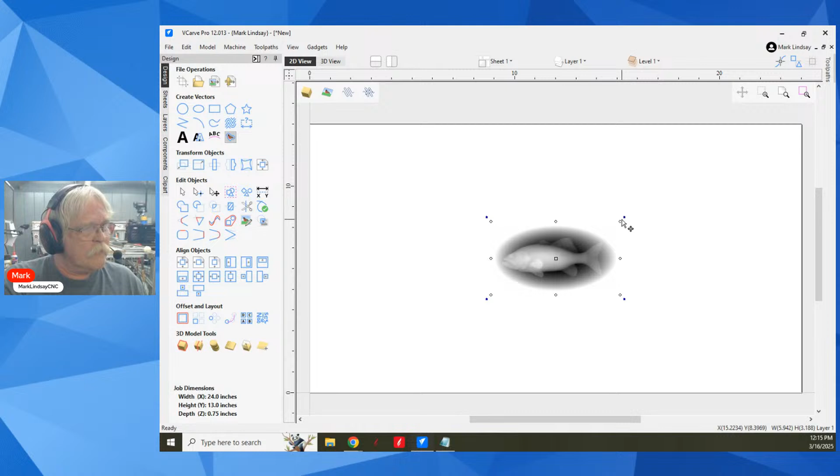And so to do that, let's get over here into VCarve. I'm using VCarve Pro for this, but I will need to get something 3D. So my 3D, let's look at here. What do we got here? We'll go for a fish in a dish. Why not? Hey, I'm a poet and I know it. All right. And I'll go ahead and enlarge this so we can all see it. There we go. We got Billy Bass.

All right. Let me go into my components here because I see another question out here. Rich asking, what's the difference between the U and the upside down U in the modeling component properties, i.e. brown interior versus non-colored interior? This is the combine mode, okay? The combine mode is how this model is going to interact with other models. Now we can right click here and go into the properties and we can see all of them illustrated right here.

The brown U's and O in this case are, this one here is merge. You're going to merge the highest points with other components. So in other words, this fish is going to merge with any other component I put on top of it or any other component underneath it. Okay. This one here is merge the lowest points. That's something we can get into another time because merge low and multiply are topics of their own that can take an entire live stream. So we'll get into those on later dates.

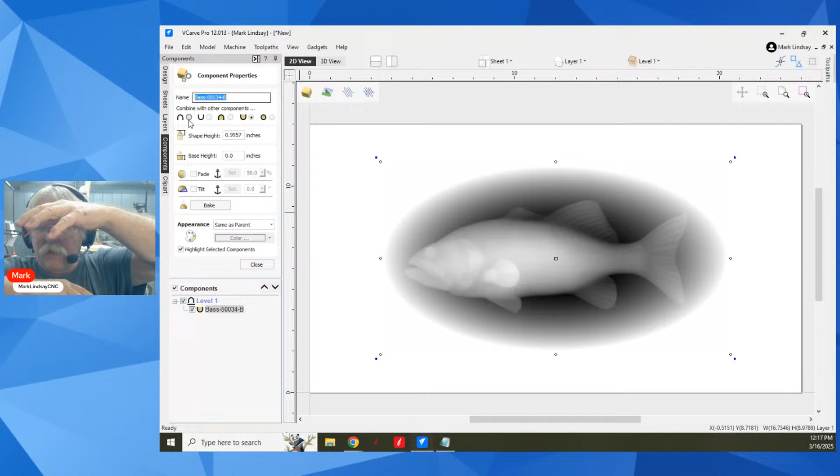These over here without the brown, this is add to the previous component. This is subtract from the previous component. What this means is if I put something else on top of this model, if I have it in add, it's going to stack that second component on top of this fish. So I'll have the fish, then I'll have whatever I put on top of the fish. If I set it to subtract, whatever I put in here is going to be subtracted from the fish.

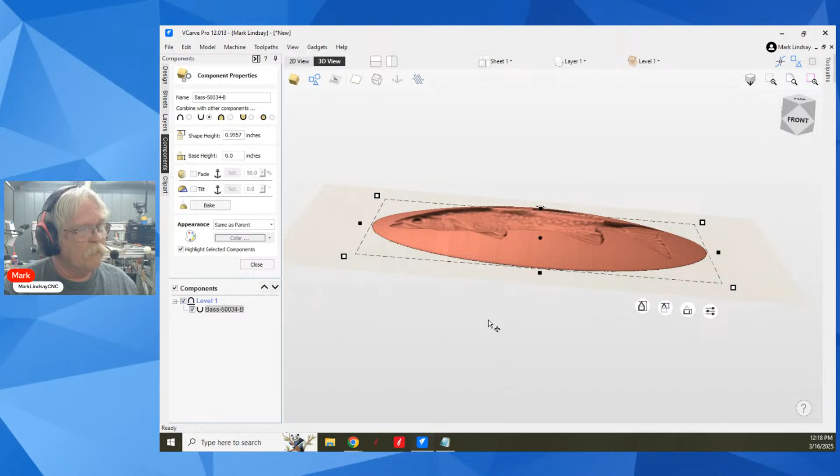If I set this model to subtract, let's take a look at it in the 3D view. We're looking at it in the 3D view right here, and we see what this looks like. If I set this to subtract, now all of a sudden, that dish has turned into a dome, and that fish is scooped out, almost like I was making a mold. And in fact, you could use this to make a mold if you really wanted to. I wouldn't do it with the dome. I would go for the flat fish, but, what can you say?

So this is showing you how it's added on top of any component below it. This is subtracting it, and this is merging the highest points. So if you look at this model, the highest points are the edges of the dish. Okay?

This becomes important here because now I'm going to add a zero plane on top of this. And this is something that bears repeating. I've said it before, I'll keep saying it. Once a zero plane is added, it becomes part of the model. Okay? It is a component.

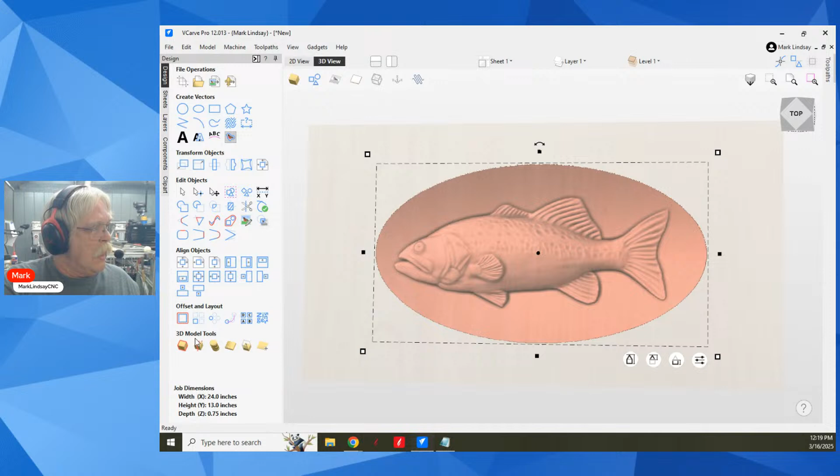So if I come out here to the design tab and I come down here to add a plane or component with zero height covering the model, and I click on that, now you see how my material lighted up. There is a flat plane with no thickness covering the entire piece of material, but it's merging with this model. And you can see that merge happen right here. It's merging with this dish. You can see that merge occurring right there.

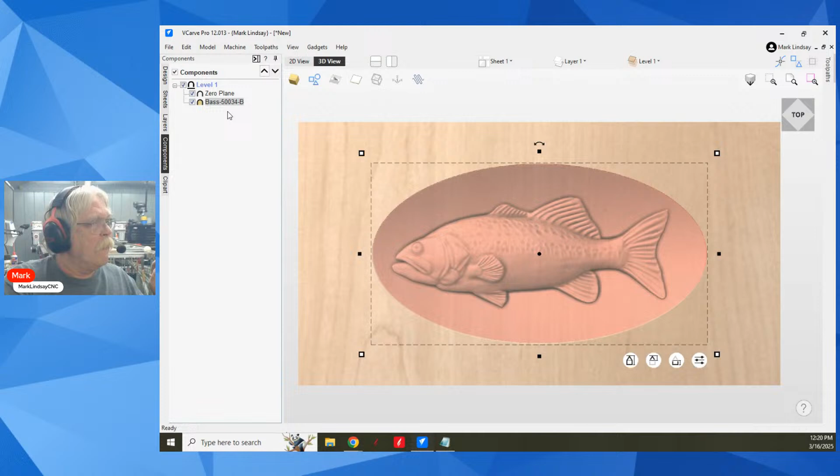Now, if I get into the component tree, we can see that that zero plane has been added. So that's what these do. These are your combine modes. It's how this component is going to interact with this component. And they are separate components that you can select or deselect. Okay? So let's go back over here to the design tab, and then we'll get into Brooke's question over here.

Talking about 3D roughing. Now, there are occasions where 3D roughing is important, and there are occasions where it's not important. I tend to say that it depends upon the project. Mainly because, well, let's talk about the purpose of a 3D roughing toolpath. The purpose is to hog out as much of this material as it can, a lot faster than a 3D finishing toolpath will run. And when I say that, it's dependent on the project.

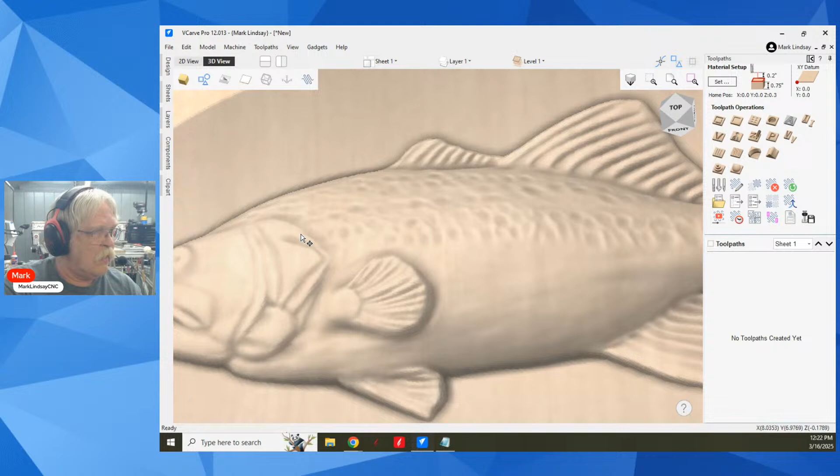If we're looking at a real shallow carve, there may not be a lot of material to remove with a roughing toolpath. If we're looking at something real deep, and in the case of this fish, we have some detail in here, we're going to need to use some fairly small bits. We want to make things as easy on that small bit as we can. Because if I'm going to use a 1/16 inch ball nose to get in here and get some of these details, it may be a 1/16 inch tapered ball nose bit, which is a bit more robust than a standard 1/16 inch ball nose. But at the end of the day, the tip of that bit is still 1/16 of an inch in diameter. So you'll want to remove as much of this as you can to make it as easy on the bit as possible.

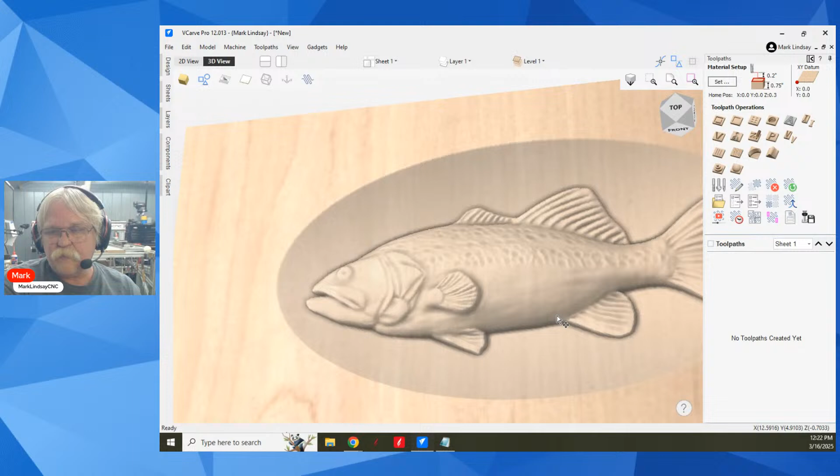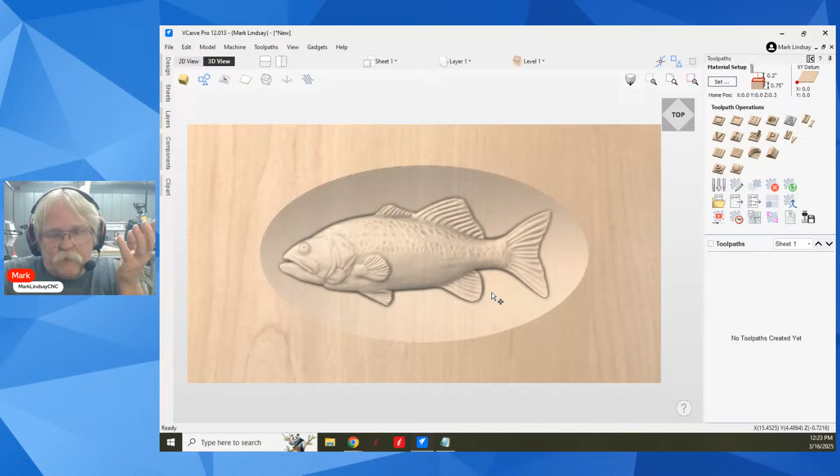So it is very dependent. If you're doing something like a 2-foot diameter 3D barn star, and you're cutting it out of a foam material that you've stacked 2.5 inches deep, you might want to do a roughing pass just to make things easier on the bit that's going to be carving that star. If you're going to do something small that's going to be held in the hand, say the top of a small jewelry box or the back of a hand mirror, you may not be carving something that deep, so you may not need a roughing pass. So it's kind of dependent on the project, as I said.

Now, let's get into the roughing toolpath, and we'll check on a couple of things here. First things first, it's going to send me into material setup. So I'm going to double check the thickness of my material. Yes. Show a detailed summary. Yes. My XY datum is correct. I'm setting my Z0 to the material surface, and we have an issue. The total model thickness is deeper than my material thickness. So I can go about this two ways.

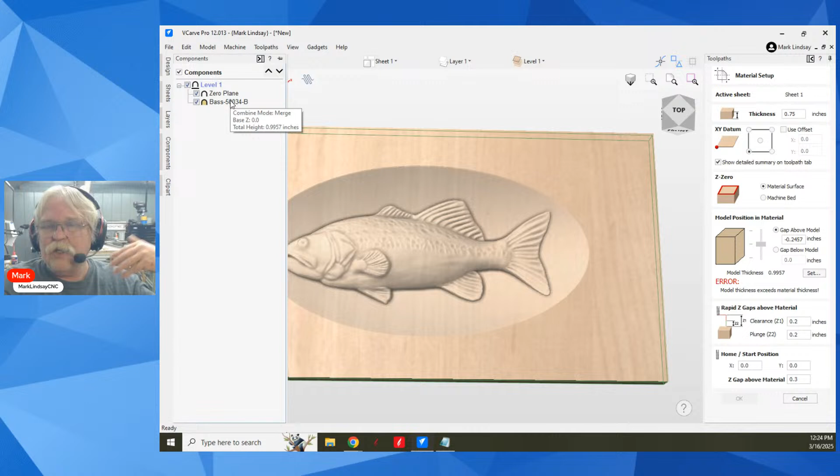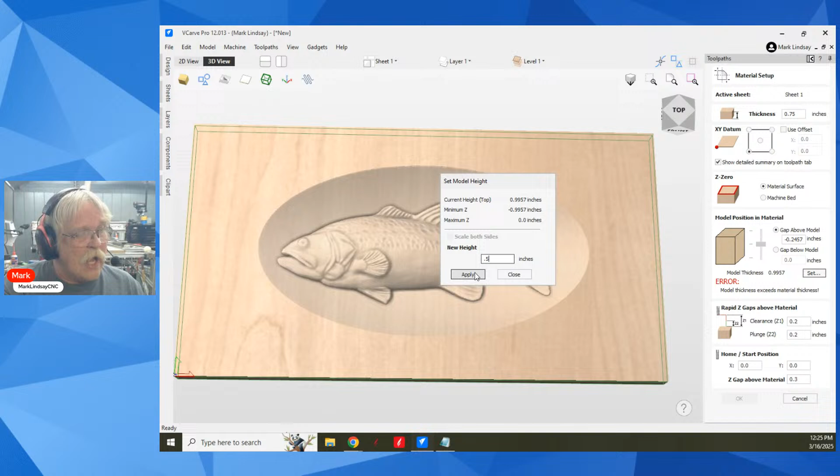I can go back over into the component tree, get into the properties, and change the shape height of my fish there. Or I can come over here and click the set button and enter a new height here. I don't want it to be 0.995. That's almost an inch tall, you might as well say. Let's go for a ½ inch. So we'll go 0.5. Now, when I click apply, let's take a look and see what this looks like. It's just changed my shape height to a ½ inch tall.

Now I need to get in here and look and see, did I lose a bunch of detail? It has flattened it. I might lose some detail, but I'm not going to carve all the way through my material. So I think I can go ahead and accept that.

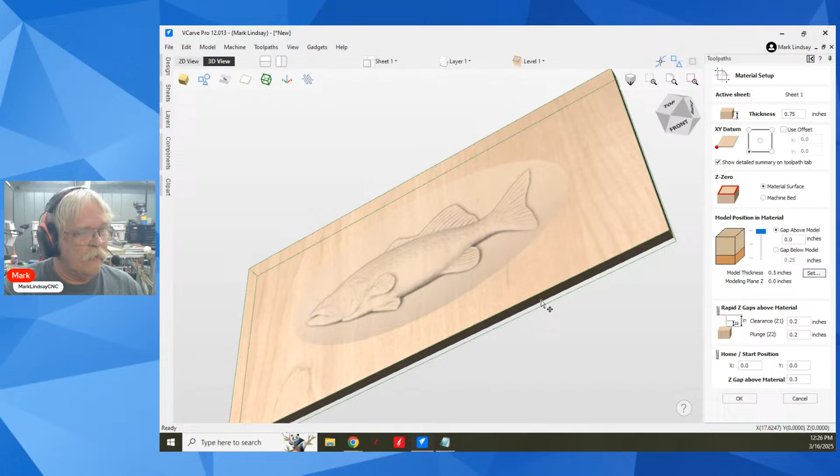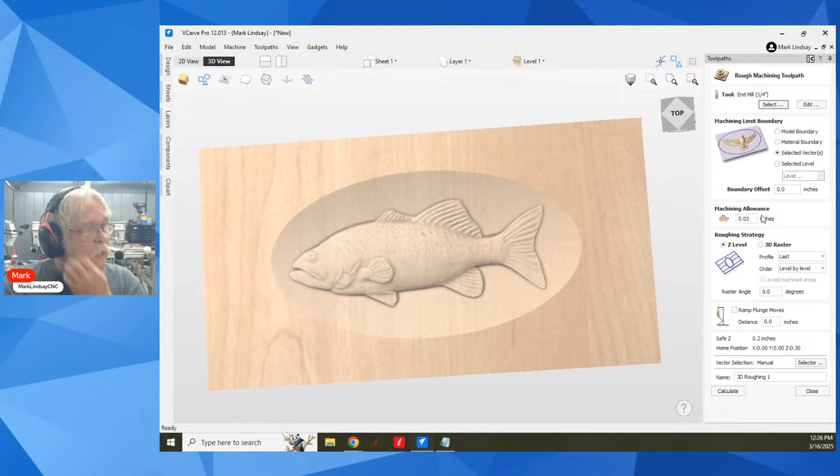Next thing I want to look at is my model position. The model is sitting up here where this light brown is. This is uncarved material. That's what's going to be left behind down here. So I prefer to put a little bit of a gap, 10 thousandths of an inch, 0.01. That would eliminate any flat spots on anything that's close to the top up here. And we'll click OK. There we go. Now, I'm going to show you something here.

I've got machining limit boundaries here. I can go to the model boundary. I can go to the material boundary. I can go to the selected vector. I don't have a vector out here to carve to. Or I could go to the selected level. I only have one level over here in my component tree. So basically, I'm down to either the material boundary or the model boundary.

I'm showing you this because it does matter. Once I added this 0 plane, that's part of the model. So the material boundary and the model boundary are going to be the same because I don't have a vector out here. So let's fix that.

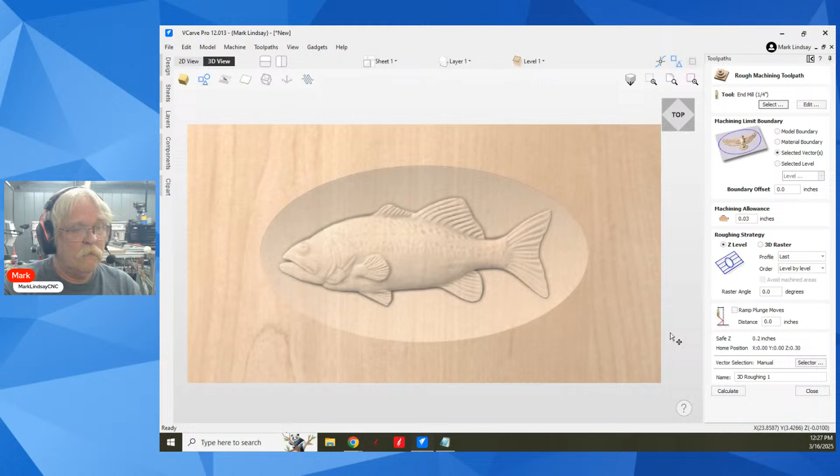Close, go back over, and I'm going to go select my fish. And where is it? It's down here, I believe. Yeah, there it is. I'm going to create a vector boundary around this component. Click, and now I have a vector. Now I'll go back over here. I'm going to select that vector, go into my roughing toolpath, and now it's only going to machine to this vector.

It's not going to try to machine the whole piece. This is important because if I have clamps out here, I'm going to run into them. It's the same as doing the entire material boundary. Okay.

Now we'll get down here into the 3D roughing strategy. We have a couple. We have Z level and 3D raster. I think this is more what you were talking about, Brooks, but I don't know that 100%. Here's where you have to be careful, and you'll have to look at your model. Okay.

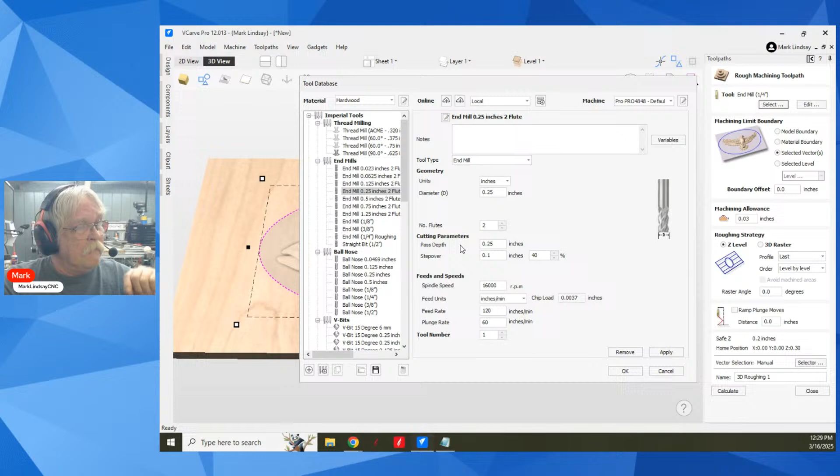Z level, what you're going to be doing is you're going to be carving this entire area out level by level as determined by the, see, what have I got here? I got 1/4 inch end mill, as determined by the pass depth of this bit. So now this is going to come down and it's going to cut down level by level 1/4 inch and machine this out. Okay, I can cancel that.

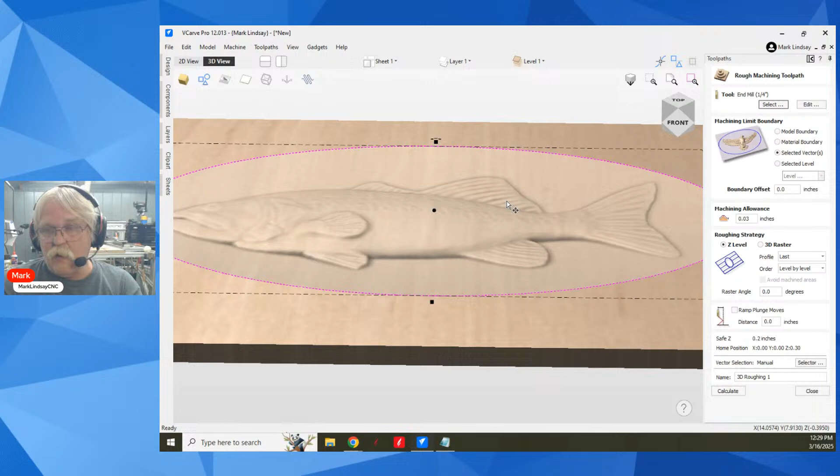It may never get all the way down into here, but it's going to start missing. It's not going to carve the model. It's going to carve away all of the waste out here, most of the waste down here. You can also do 3D raster.

Oh, and I should say with Z level, you can have it do a profile last, first, or not do a profile. And what I mean when we say profile, we mean carving around this vector right here. That may not be important, okay? It may not be important to do on a roughing. I tend to leave it at last.

What order are we going to do it in? I go level by level. Just go level by level. Okay? I've never used depth first, so I don't know that I could give you a definitive answer as to what that is. Maybe Michael Mezalick can help me out. But I've always gone level by level.

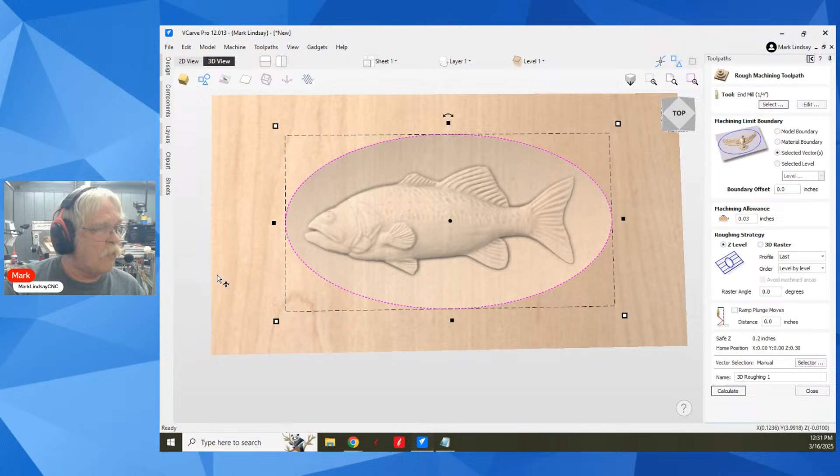The raster angle is, we're not using a raster toolpath. We're using a Z-level toolpath. It is going to raster back and forth to remove this material. I set the angle to match the grain. With this board being vertical grain, I would set an angle of 90 degrees. Basically, that's just to kind of help avoid doing any chip out around on the outside. Because again, all of this is going to be carved away.

Okay. I haven't talked about boundary offset and I haven't talked about machining allowance. I will talk about machining allowance. This allowance, in this case, 30 thousandths, that's as close as this roughing toolpath is going to get to this actual model. It's going to force the tool to leave a 30 thousandths of an inch skin here. What it does is it keeps that bit from carving down into this model. Okay.

Maurice over at Ericsson Design says, my roughing passes come down to the limits of my belt-driven CNC. Clearing enables me to run a tapered ball nose faster if I'm only removing under a 1/4 inch of material above my model, decreasing my overall machine time. Yes. Again, yes. You can run that bit a little faster. You can plunge a little bit faster. And you're making life easier for that bit. That's the whole purpose of a roughing toolpath.

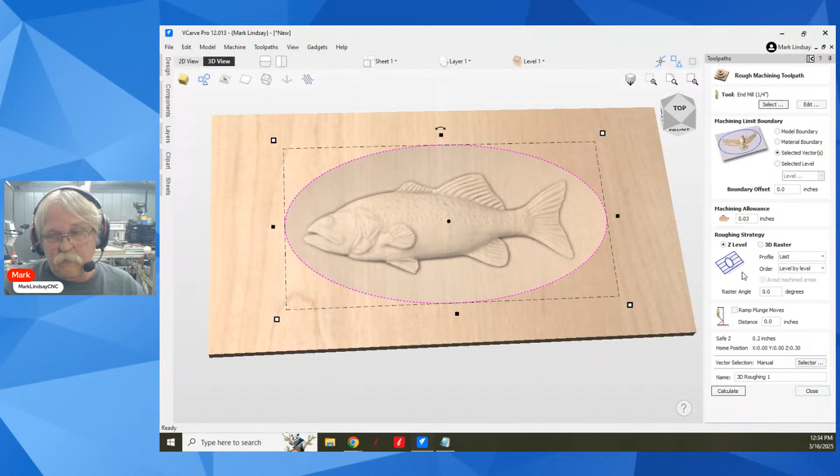And you can avoid machined areas. You can set a raster angle here as well. But again, this is dependent upon the project, dependent upon the model. Okay. I tend to run Z level. And that is mainly going to be carving this area out here. It'll get close to the fish, but it's basically going to remove the skin above the top of it and then not get any closer to this model. It'll let that finishing bit do all of the work there.

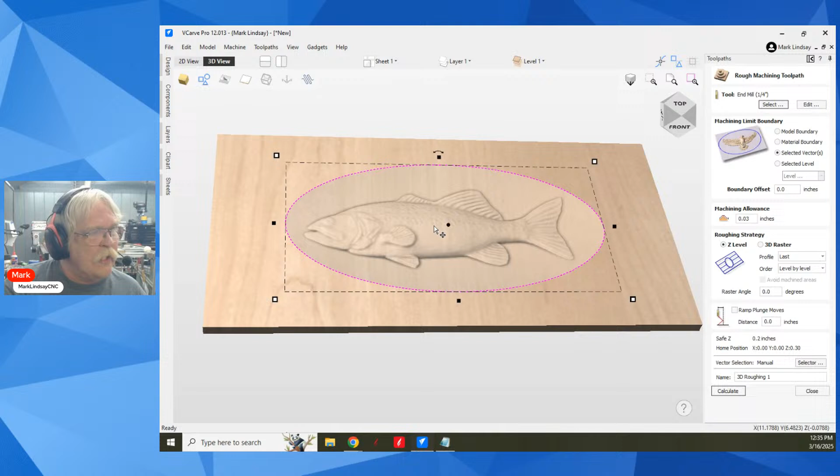So that's how I work with roughing toolpaths. Generally speaking, I go with Z level. 3D raster adds a lot of machine time, but it can be the better way to go. Again, if you're going with something small that's going to be held in your hand and you're going to be using a very tiny bit with a delicate tip on it, it may benefit you to use 3D raster. In that case, I would probably go with, say, a 1/4 inch ball nose and not a standard end mill. And that will be able to get in here and get a few more of these details roughed out.

But again, it comes down to the project. If this is something that's going to be on a wall 8 feet up and seen from the ground, you're probably not going to use tiny bits to do that. Probably not.

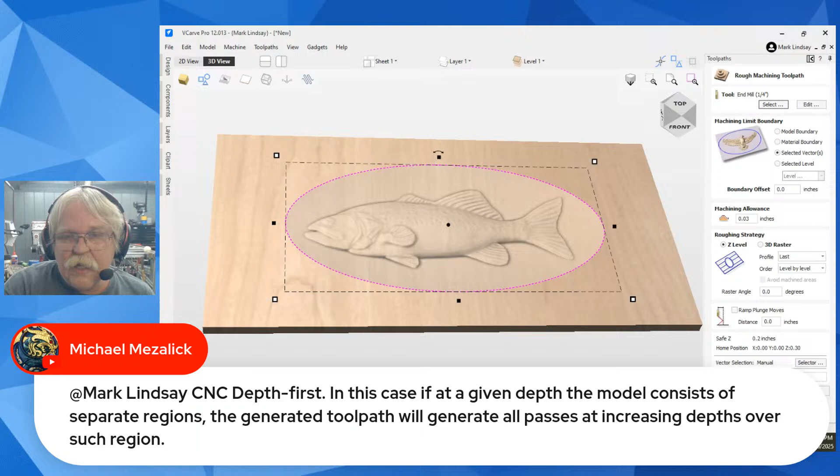So, okay, Michael has an answer for me on depth first. In this case, if at a given depth the model consists of separate regions, the generated toolpath will generate all the passes at increasing depths over such region. Then it will advance to other such regions. Okay, so in this situation then, Michael, since it's basically one region, and I don't have a fish over here and a fisherman over here and then an eagle over here, it's going to do each region first, and then move on to the next, rather than attempting to cut them all. Okay, got it. Thank you for that. I appreciate that. I've not used it, but I can see how it would come in handy.

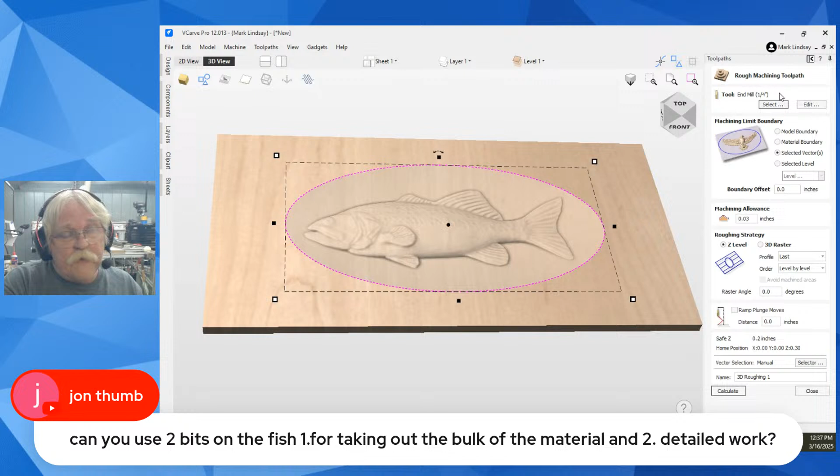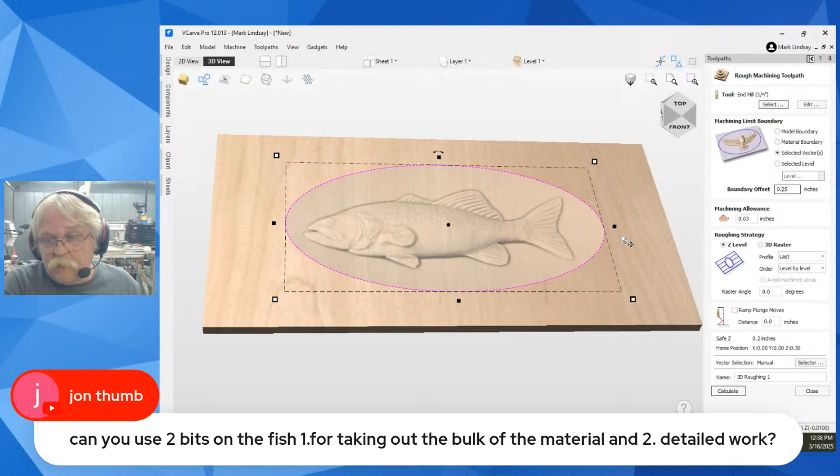So, John Thumb is asking, can you use 2 bits on the fish, one for taking out the bulk of the material and one for detailed work? On a roughing toolpath, you can only use 1 bit per toolpath. I'll go ahead and calculate this. I'm going to use a boundary offset that's equal to my end mill's diameter, so 0.25. One decimal mark, not 2. All that means is the bit is going to go beyond the edge, beyond this vector, by 1/4 of an inch. Okay. And we'll calculate it.

All right. Now you see what it's going to do at each level. We'll go ahead and preview that roughing toolpath, and that's what it's going to leave behind with those settings that we used. It's not carving the fish. It's removing a bulk of the material around the fish.

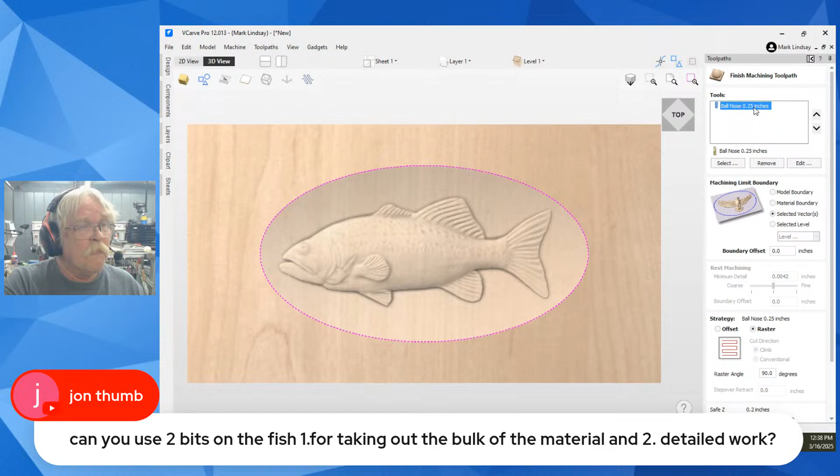And I know, Brooks, that you asked about roughing, but I'm going to get into finishing as well because it is pertinent here. When we get into the finishing toolpath, we also have 2 other strategies, offset and raster. I'm going to go with the selected vector. To answer Jon's question, this is where you can use more than 1 bit on your finishing toolpath. Now, there's nothing saying you can't make more than 1 roughing toolpath, but generally by the time you start getting into that, you're adding quite a bit of machine time, and there's not really much benefit.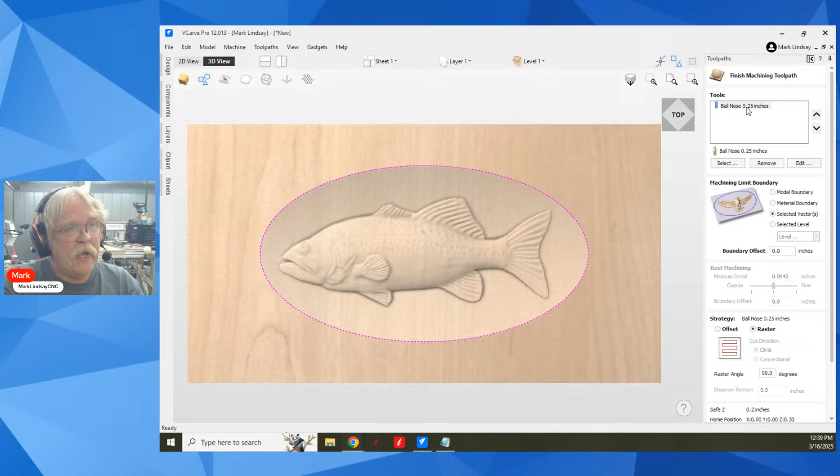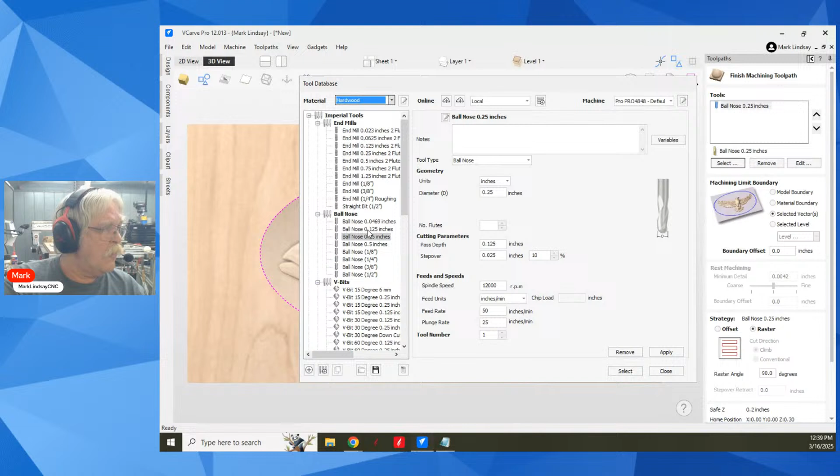So for my finishing toolpath, what I have here is a 1/4 inch bit. These parts of the dish out here and a lot of the fish itself don't really require a lot of detail, so they don't need a super tiny bit. But I can add another one. And let's go with an 1/8 inch ball nose. Well, let's see what I got available here for tapered ball nose bits.

We'll go with a 1/16 of an inch tapered ball nose here, and we'll select that. And now this has added both of those bits there, okay? What's going to happen now is that 1/4 inch ball nose is going to get everything it can get. And everything it can't reach, like if it can't reach down in here or into the mouth down here where the gills are, it's going to do its best it can, but then keep track of what that 1/4 inch bit can't reach. Then it's going to create another tool path just for that 1/16 of an inch bit. Okay? So it's going to get in here and get all this stuff that the 1/4 inch bit can't reach.

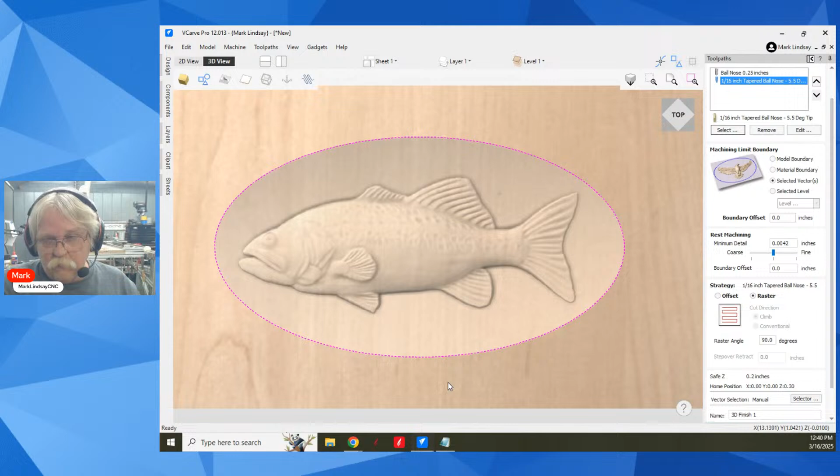Offset versus raster. This causes a lot of confusion as well. And here is where this becomes important. You have to look at your model. If your model is like this and you have a dish, even though we've got some height here, there's a little bit of material to carve through. On something like this, raster is the way to go. The reason for that is raster is going to start out here and it's going to move back and forth. With the raster angle of 90 degrees, it's going to start over here close to my start point and it's going to move up and down and it's going to cut progressively deeper. That's going to be a heck of a lot easier on the bit than if I use an offset strategy.

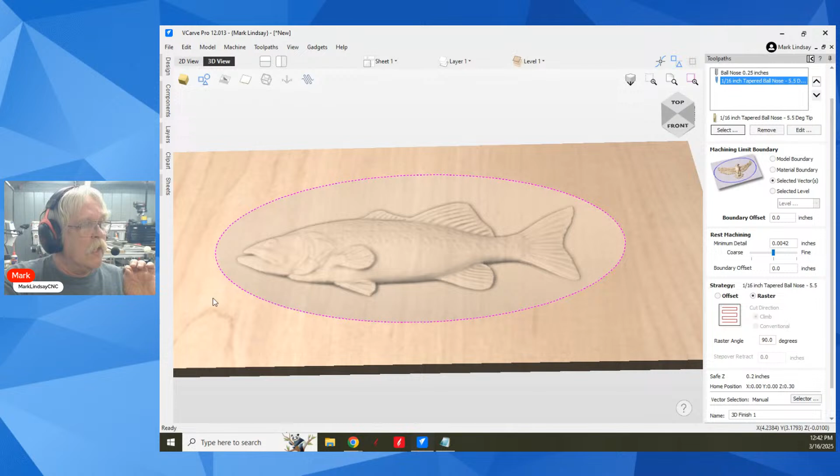An offset strategy, it's going to start in the middle. The bit's going to come over here and it's going to plunge down to the center and start carving in a spiral. Okay? It's going to carve down to the final depth. So, if you are cutting a 3D model that has some depth down in the middle, you'll want to use a raster strategy to ease that bit down on a dish. Having said that, let me go ahead and we'll calculate this with a raster of 90. Okay.

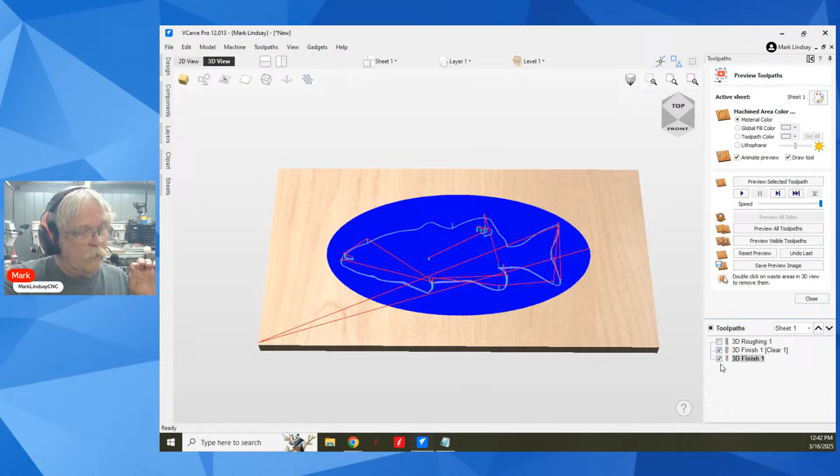And I will preview the first one. Oops. Undo last. I meant to preview that one. Preview that tool path. You can see how that went down in there and eased its way down into the depths of that model. The 3D finish, that's all it's going to do. The 1/4 inch bit was able to get everything else. But you can see here what that little 1/16 of an inch bit is going to carve. So let's carve that. And there's our final model. Okay. Now, going with a raster toolpath in this situation, where you have a gradual incline here down to the final cutting depth, it's best to use a raster toolpath. Okay. Let me close this and we'll do something else.

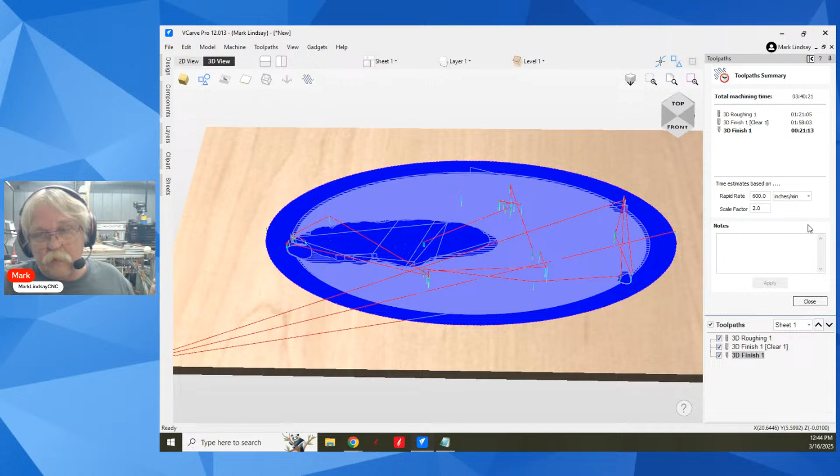John is asking, how long did that estimate to complete? It's pretty big, so let's find out. 3 hours, 40 minutes with my settings. That's for everything. So 3 hours, 40 minutes, but then again, I've got this behemoth behind me. It's a pretty robust machine, okay? So let me go back over here and we'll do something else real quick. Yes, having a big, robust machine works. It really helps out there, Rich.

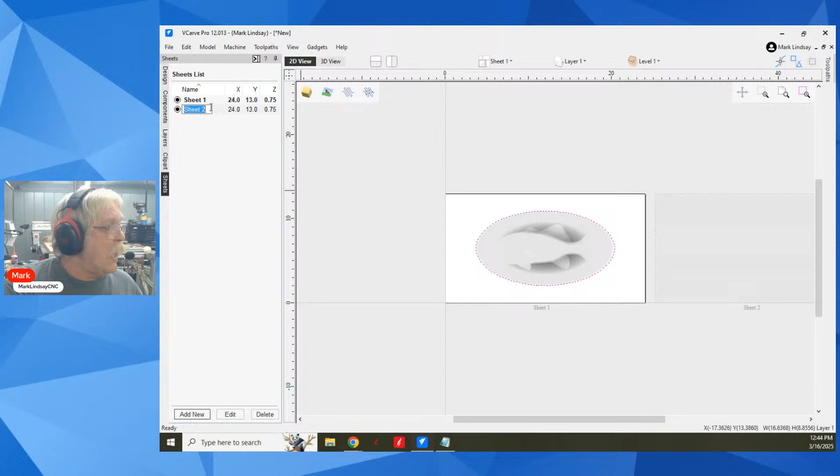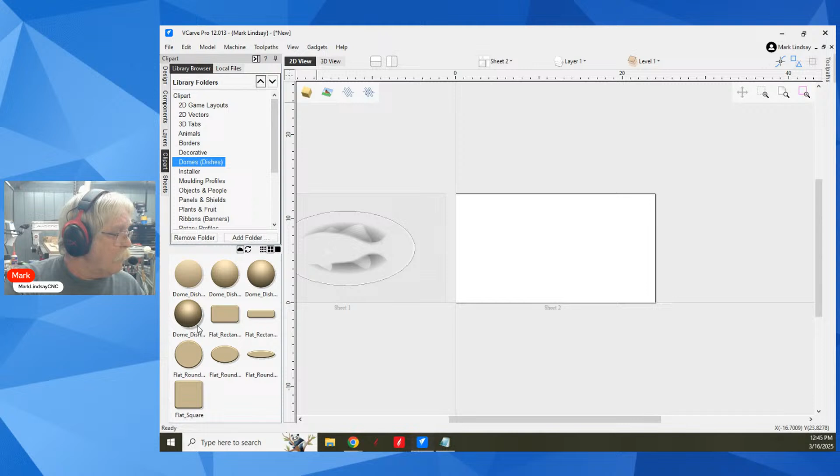I'm going to go in and I'm going to add another sheet. So let's go down to my sheets tab, add new, and I'll just call it sheet 2. Go back to the design tab and I'm going to go into sheet 2. That's going to be my active sheet that I'm going to work with. Okay. So we're going to go over here to clip art, and let's take a look at domes and dishes. We'll go for a flat rectangle here. And I'm going to make this larger. And I'm going to go back into my design tab. Let's take a look at the 3D view and see what we got.

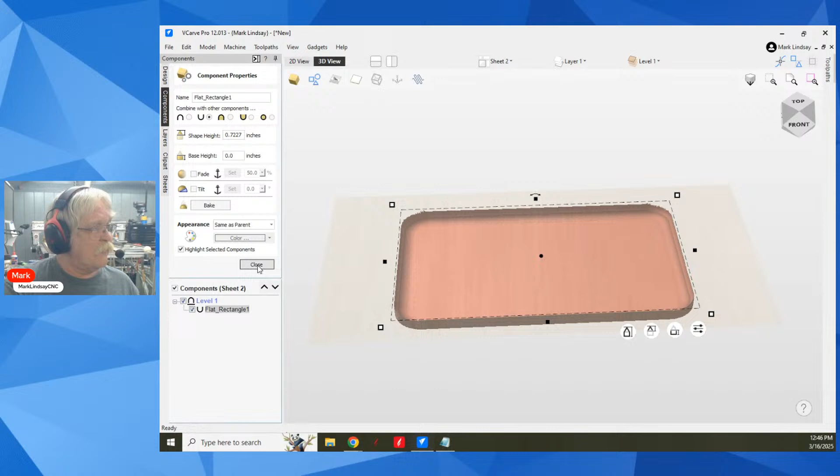Right now, my component, go into my components tab, it's set to merge positive. Well, if I don't want that to merge positive, if I want to cut this down into this piece of material, okay, we'll leave it at that shape height. I want to cut down into the material. So I'll change that over to subtract. And now we can see that I'm going to be dishing this out. Okay. I'm going to leave that thickness. I wouldn't cut it that thick, but I'll do that for a demonstration. And go back into my design tab. And now I'm going to take a look at all these jagged edges. And this is why I add a zero plane on every dish that I carve.

Watch what happens when I add a zero plane. Boom, it fills in all those jagged edges. But now this has become a part of the model again.

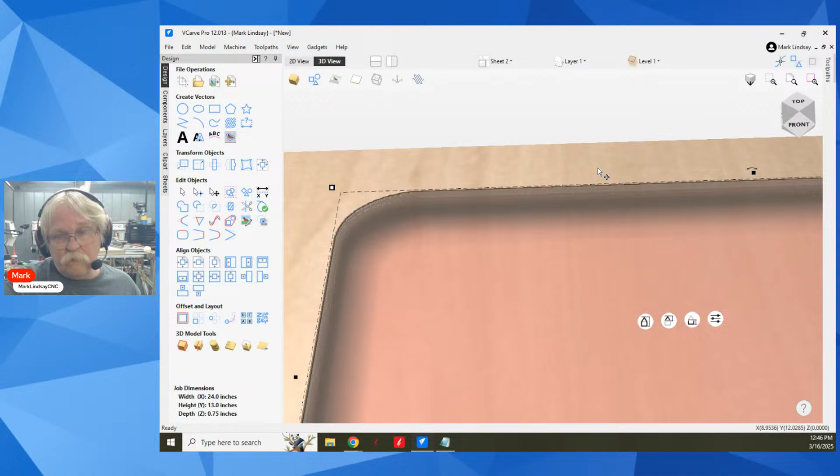So let me draw a vector around it so I have a boundary. Come back over here, I'm going to select that vector.

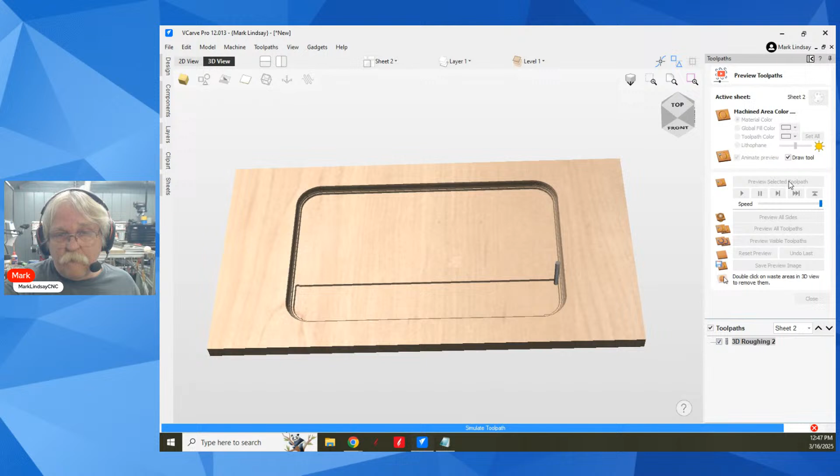And I'm going to do a roughing toolpath. For this, it's going to be a little bit easier, simply because Z level is going to take it down pretty close. I'll go ahead and use everything that I've got here. We'll calculate it and we'll preview it. All right, there we have roughing.

Now let me go into my finishing toolpath. And it doesn't have a lot of detail. I don't need this 1/16 of an inch tapered ball nose, so I can remove that. All this could be done with the 1/4 inch ball nose. But here's what I'm talking about when I say we've got to watch what we're doing. In this case, I have nothing out here, but I've removed most of the material down to that 0.030.

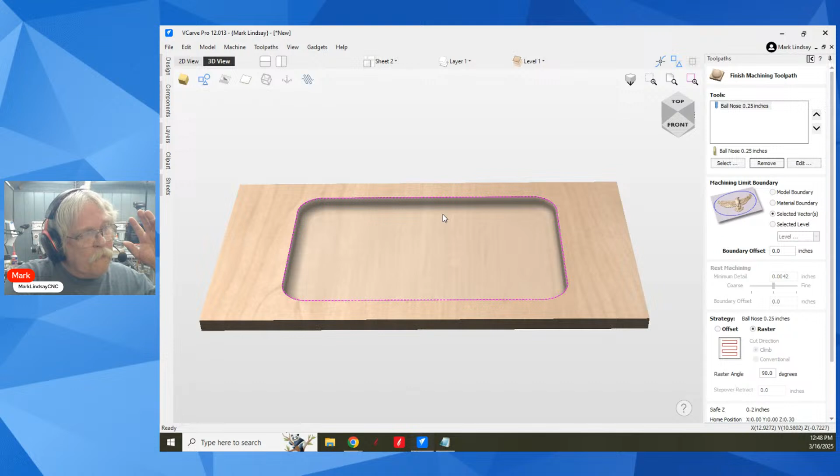If I plunge down into the center, do I risk breaking the tip of this bit if I use an offset strategy? Well, it's a 1/4 inch bit, probably not. But if I haven't used that roughing toolpath, I have very much put myself at risk of breaking that bit, because on an offset strategy, just look at the little diagram. The bit's going to move over to the center, plunge all the way down, and start cutting at full depth in a spiral.

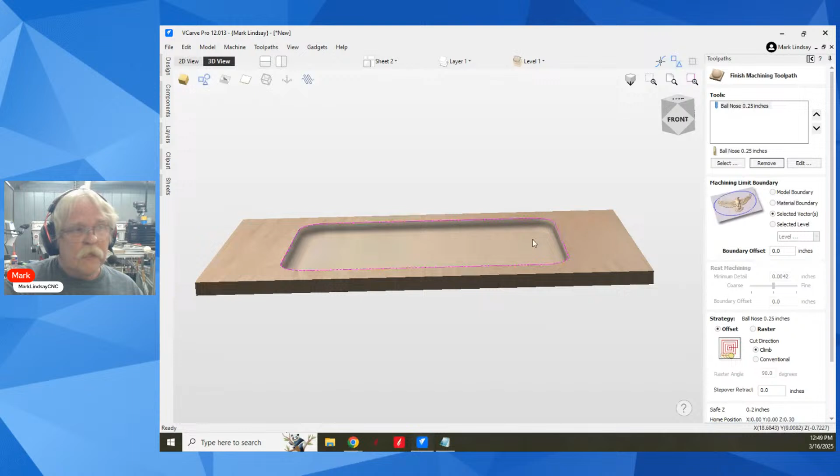But I also have a very steep drop off here. I don't have that gradual dish shape, I've got a very steep drop off. This is where roughing becomes crucial, because I can in this case use a 1/4 inch ball nose, but even it has its limits. And cutting 0.72 in one pass for a 1/4 inch ball nose is probably going to be too much, unless you have a major robust machine.

Does the finishing pass use the bit settings for depth of cut, i.e. multiple cuts for deeper cuts, or does it go to full depth on the first pass? That's exactly what I'm talking about.

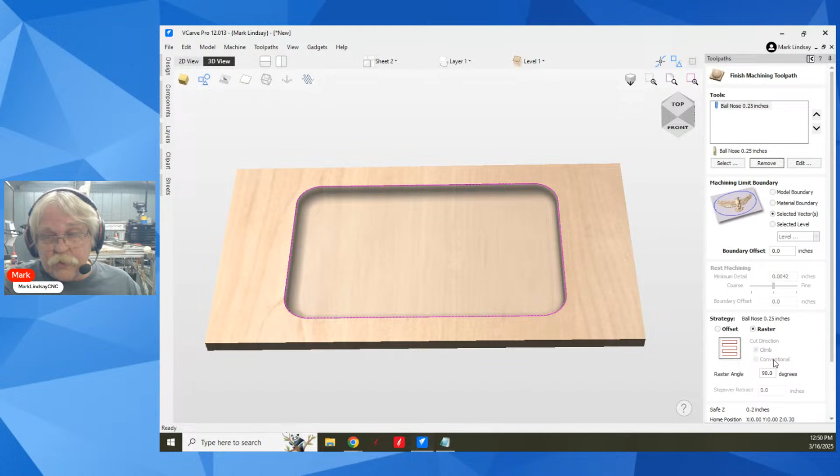When you are using the offset strategy, it's going to go full depth. If you use a raster strategy, it too is going to go full depth, but it's going to start out on the edge and usually ease its way in.

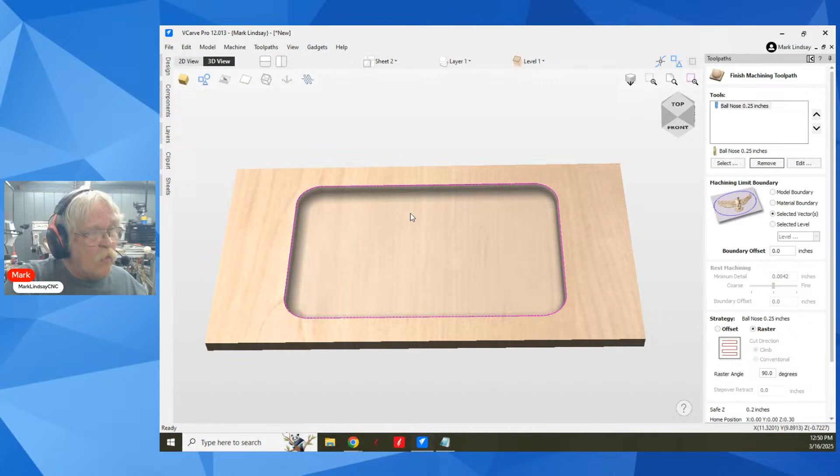Now, again, in this case, because I've already done a roughing toolpath and it's taken away most of this material, the most I'm going to end up cutting is 0.03, which is, if you can imagine the gap on a spark plug, that's about how much material is going to be left. On an older car, nowadays they go 0.045 and up.

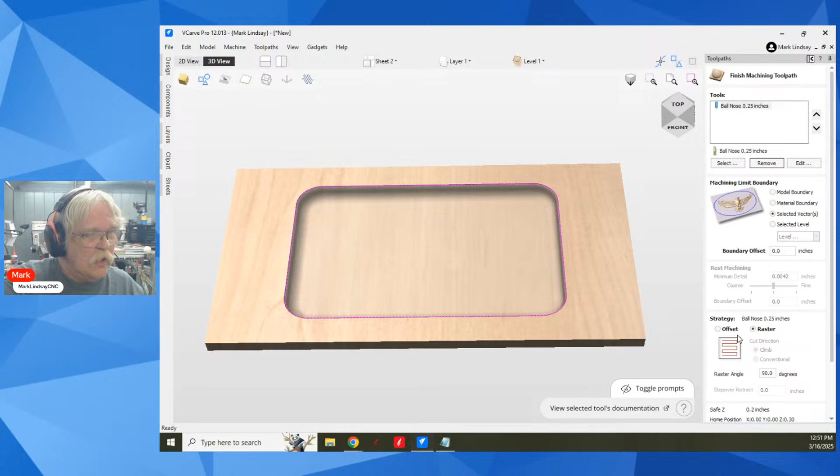But let's go ahead and look at it offset and see what that's going to do. We'll calculate. Now we see right here, remember, light blue is a plunge and green is a retract. So it's going to move over here to the middle of my project, plunge down full depth, and start carving. So here, if I didn't use a roughing toolpath, I'm at risk of breaking the bit or messing up the machine.

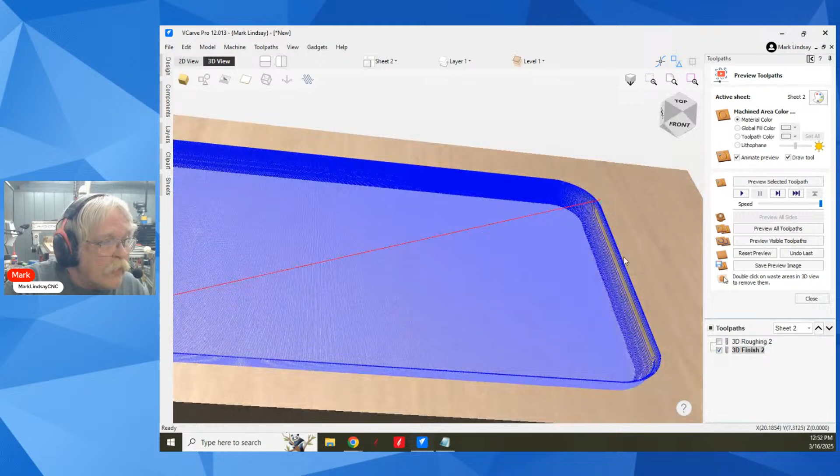We go back into that and take a look at it from a raster point of view, with a raster angle of 90 degrees, meaning it's going to go up and down like so. Calculate. And now we can see it's going to start over here on the edge and work its way down. If we take a look, we can see all these blue lines, that's each pass, it's going to work its way down into the bottom, without burying that bit out here somewhere in the middle of all that material. So we can preview that. And there we go.

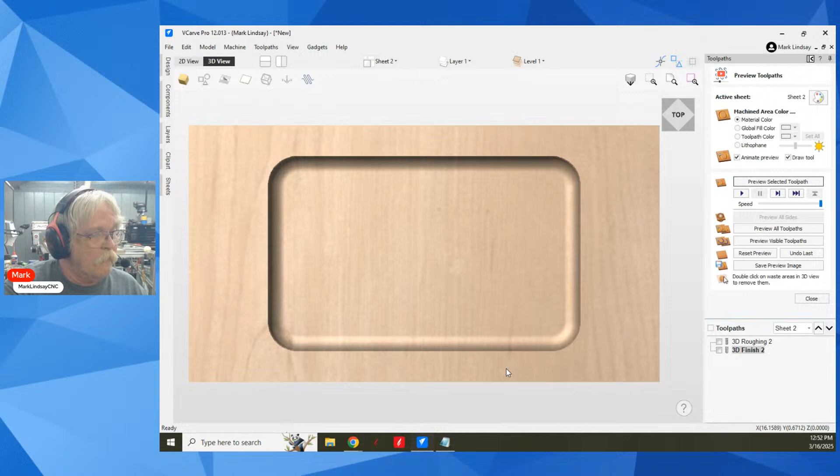Again, it's all dependent on the project and the material. Something like this, I would definitely use a roughing toolpath with. Now, I know people that don't use roughing toolpaths at all, but these are people who have big, robust machines.

Then they have bits that can handle it, and you also got to look at your materials. If you're doing hard maple or hickory or purple heart or something of that nature, you're going to want to use a roughing toolpath. When you're into softer woods, like, say, cherry - not that cherry is a soft wood, but it's a heck of a lot softer than maple or even oak - you can be a little bit more aggressive, and maybe you don't need to do a roughing toolpath.

But I know a lot of people that don't use roughing toolpaths at all. They just let the tapered ball nose handle it all. And tapered ball noses are pretty robust bits, they can handle a lot of punishment. But again, look at the tip diameter. If you've got... let me grab one here real quick.

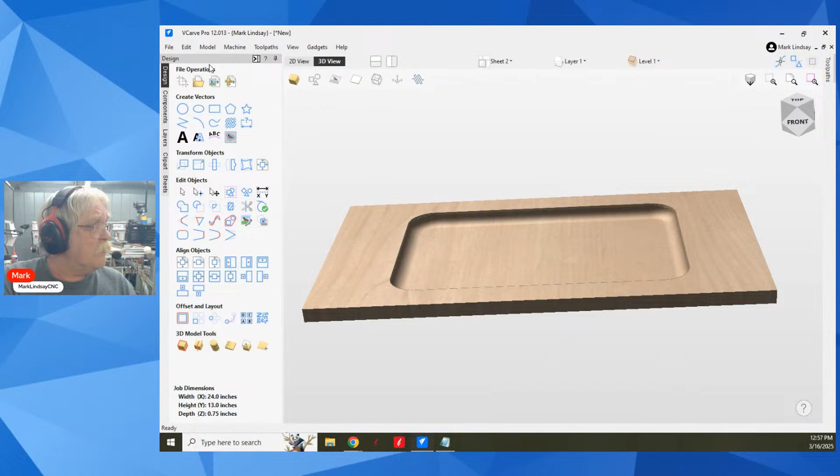Let's see here. Erickson was asking what was the size of the ball nose and the step over settings I used for the fish 3D model. Let me bring this back and we'll go back over here, into 2D view and back over to the fish. I don't know why I did that. Close that, and what did I use for...

For the quarter inch tapered ball nose, click on edit. I went with an 8% step over. I generally go with less than 10%, but depending upon the model, I have been known to go down into 4%. It just depends on what it is, the model and the project.

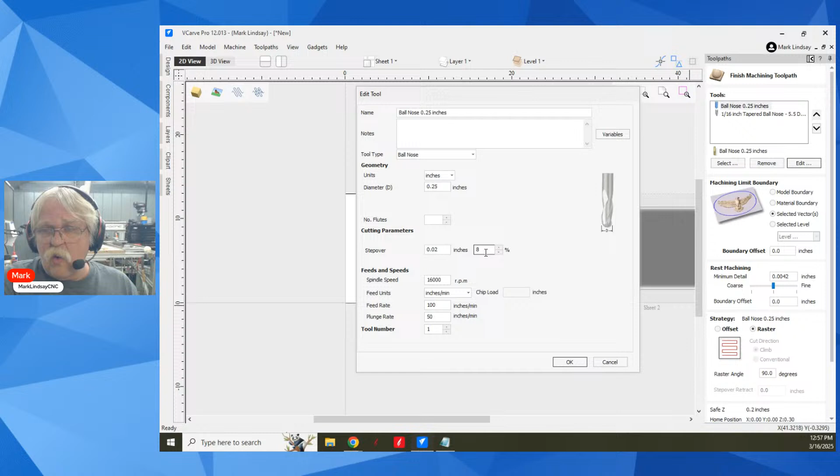It just depends on the project. Again, if it's a 2-foot diameter barn star that's going to be mounted up in the eave of your roof, 14 feet up off the ground, it doesn't need that much detail. I can use a half inch ball nose on that, and I'll still use about an 8% step over and get something that's good. But if I'm doing something like the lid of a jewelry box, I'm going to go for a pretty small step over.

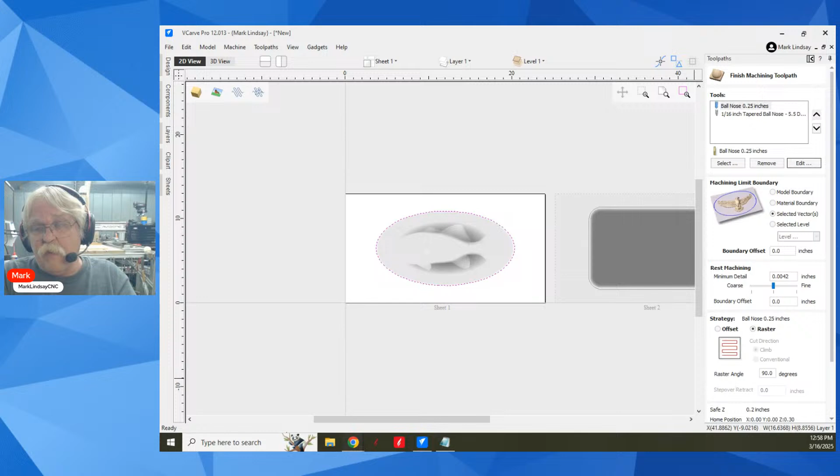A lot of people don't like me saying this, but it is the truth to me. I would much rather spend an extra half hour on them in machine time than spend 2 hours sanding and cleaning it up by hand. I'm not in production, okay? I don't have to get out 100 projects in a day. I can afford to take that time, but I have to prioritize my time.

I'll be honest, I'm not just sitting here watching the bit go back and forth, although I still do that sometimes, depending upon what else I got going on. If this is over here carving away, I'm over on the table saw 9 times out of 10 cutting out more stuff.

Generally, like I said, I've been known to go down to 4%, but usually it's less than 10, in fact almost always less than 10. However, depending upon what you're doing, that can add texture to a project that really looks cool, whether you mean it to or not. If you're doing something like this fish, it's not desirable to have that texture, I get it. But if you play around in here a little bit, you can put a texture in the background at a wider step over, and then that can work to your benefit, you know?

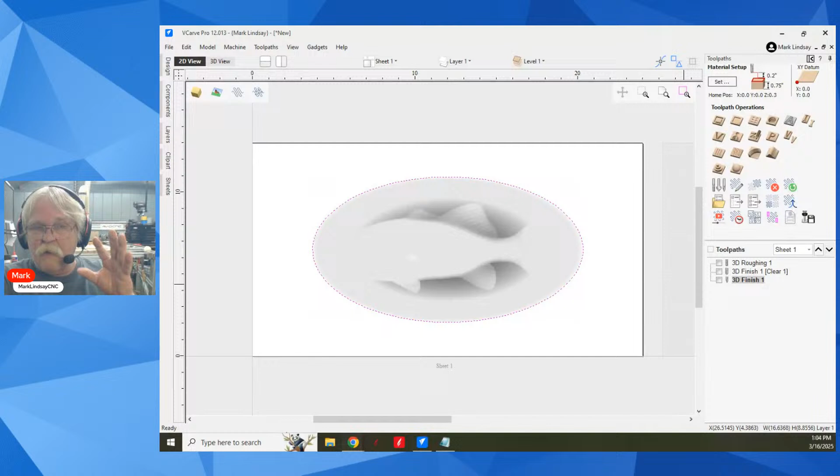It's pretty straightforward. What I'm talking about is over here in job setup. Okay, now I did it wrong. I have a 3D model out here. 99 times out of 100, down here in modeling resolution, when I have a 3D model in the design, I will bring it up to very high, 7 times slower. That's pretty high resolution, okay?

All that means is the 3D model that's brought out here, the surface of the material is divided into 4 million points. Think of a picture you're working on in imaging software, Photoshop or what have you, you know about pixels. This setting right here divides the surface of the material into 4 million pixels. Quite a bit.

But there are others, and people get in trouble with this. I'm showing you so you can avoid trouble. Hold down Shift, go back into Job Setup, and now all of a sudden I have 2 more: extremely high, which is 20 times slower, and maximum, which is 50 times slower. Click on maximum, and now the surface of my material is divided into 16 million points.

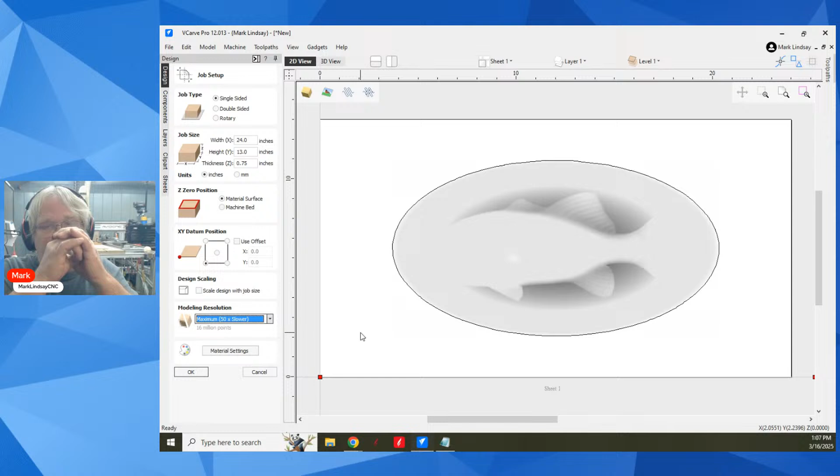That was when I was kind of doing a prototype. Somebody wanted to do a casting in wax, so I carved the wax mold for their positive. The whole project was about the size of a quarter, which is, let's see, I don't know how many millimeters that is. So, generally speaking, that resolution is not required.

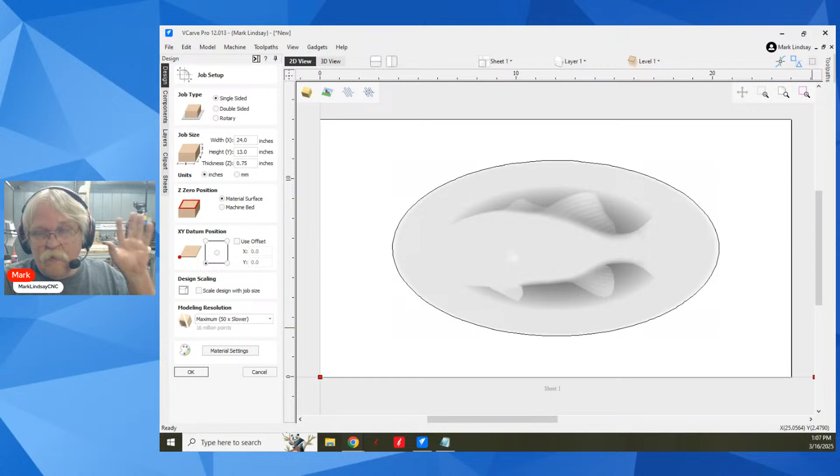Brooks Martin says all of his 3D model creations are at 50x, he's got a strong PC. You're also using resources you probably don't need to use, but hey, if it works for you, be my guest. For this, you need a seriously, seriously robust PC, okay?

So if I really wanted this at very high, I would have to delete these models and re-import them.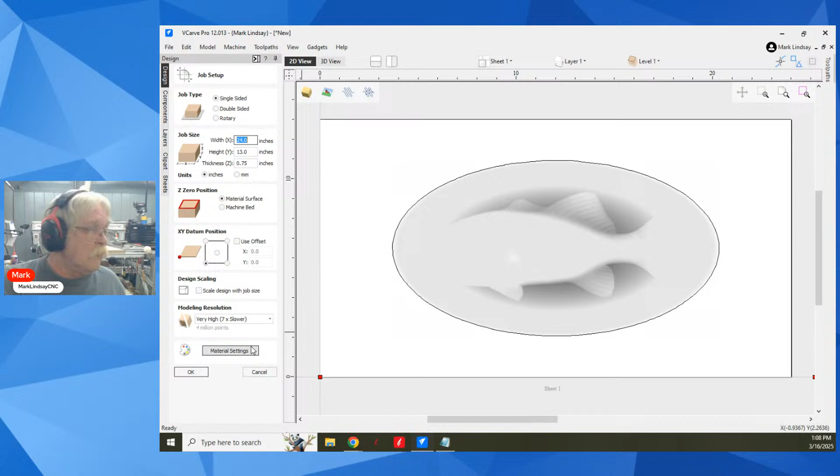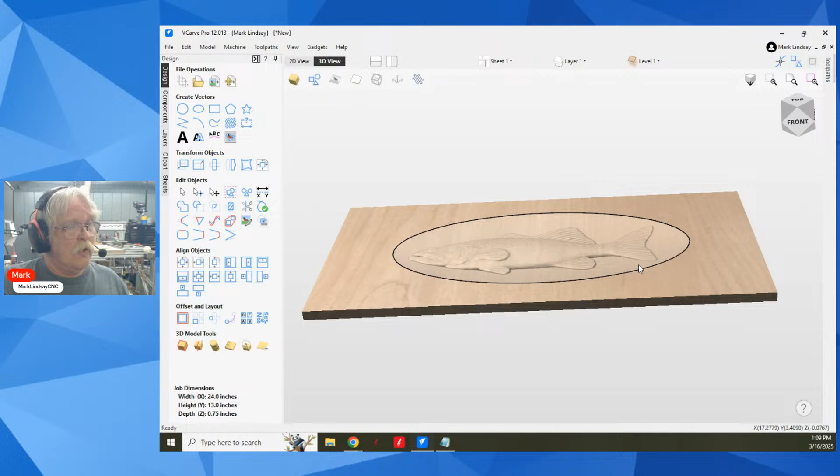The other thing that could be using up a bunch of your resources is up here in, let's see, is it toolpaths? Yes, your preview simulation quality. You'll notice I have mine set to standard. And that is the preview out here in the 3D view. It's set to standard, and that's why you will occasionally see some pixelizing out here.

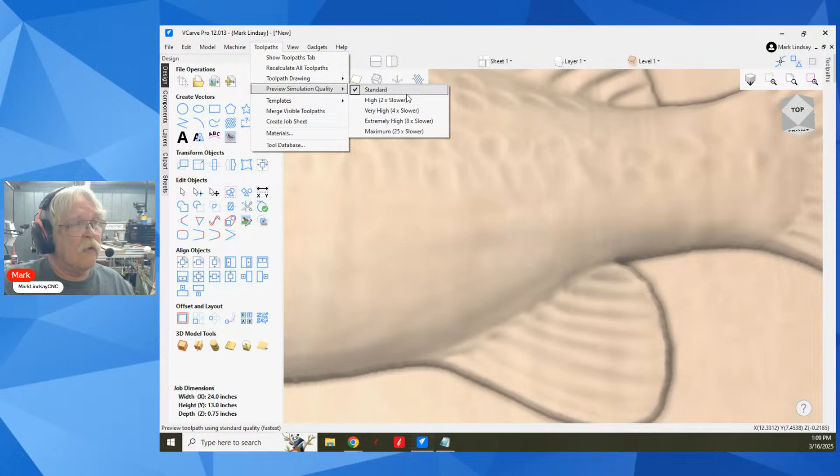This has nothing to do with the actual model itself. This is just the display that we're looking at. Okay? I could go all the way up to maximum, and on my design computer, I have it on maximum. The reason I have this on standard is because, again, it slows everything down, and I'm trying to demonstrate toolpaths out here. I don't need super high resolution to demonstrate the toolpaths and what have you.

So my point being, your modeling resolution and, go into the toolpaths menu, preview simulation quality. These two can work against you when it comes to it appearing to hang up while you're previewing a model. Let me go back into the preview toolpaths again. Also, you have the speed. It may behoove you to slow it down to give the computer more time to run these calculations.

You also have animating the preview and drawing the tool. You may not need to draw the tool. I do here because I'm demonstrating. But you, in your design environment, you probably don't need to draw the tool. So if I click on this, select that one, and I preview it, well, the speed was so fast, undo last. It's drawing the tool and it's animating the toolpath. Well, I can turn that off so it's not drawing the tool, and that helps.

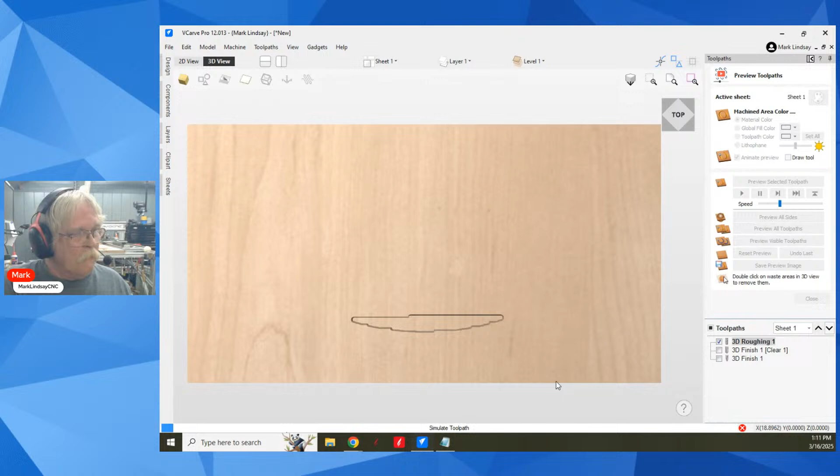But when I'm inside on the computer designing, I don't need to see it animated. I don't need to see the tool. I just want to see the end result. Well, I can't change a lot of this because it's already running, but I can speed it up. And there we did that. Let me undo that. And let me get rid of animate the preview. That's going to save some resources as well. And now with the 3D roughing selected, I'll preview it, and boom, look how fast that was.

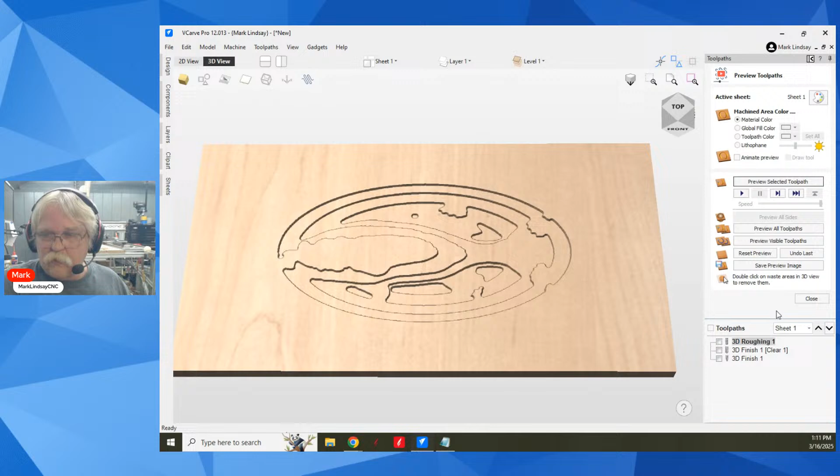So you don't have to animate the preview. You don't have to draw the tool. And you don't have to do super, super high quality. About the only time that I will use this is if I'm going to save a preview picture. If I'm going to save a preview image, then I will use a high preview simulation. And again, on my computer in the house, this is set to the highest, the maximum. But if I'm going to send a preview photo, I will probably use that higher resolution.

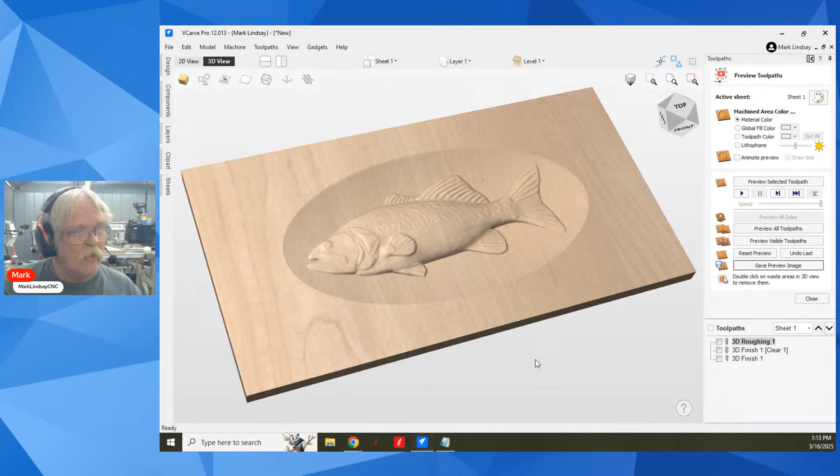And then once I'm done with the previews, preview visible, shaboom. See how fast that previewed, Kurt? And if I'm going to send a preview, I'll kind of put it at a jaunty angle like so. Get it out here to where it's kind of in the middle. I can see all the corners. Save a preview image and send that image to the client, the customer, whoever. Okay. That's about the only time I ever use those really high resolutions out here. Okay.

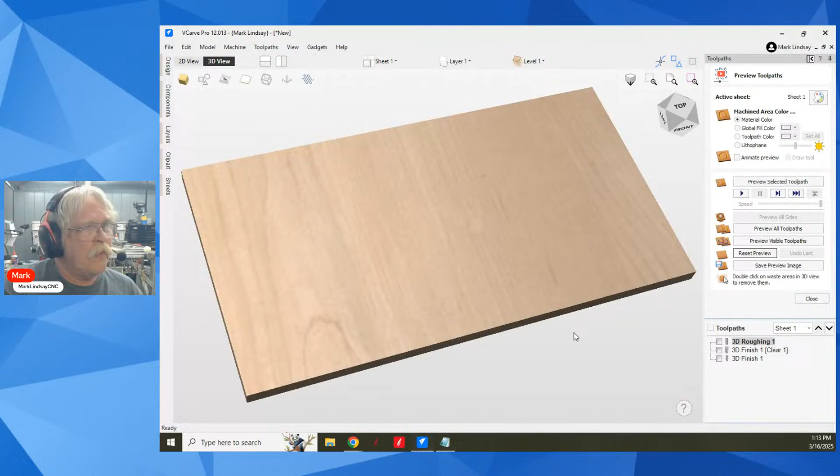Let's see. Are there situations where showing the tool won't show up the tool? I had that issue the other day. Not sure if it's a glitch or not, but I needed to check start points and end points. And it would have been easier to see them on the show tool thing rather than going into every single diamond engraving. It can, but let me go bring this back and we'll reset our preview, go back up to the top. And we'll just use the roughing here.

I'm going to bring the speed way down. Come on. Oh, you're not going to let me do that, are you? Undo last. You're not going to let me do it. You're not going to let me turn the speed down. You dog.

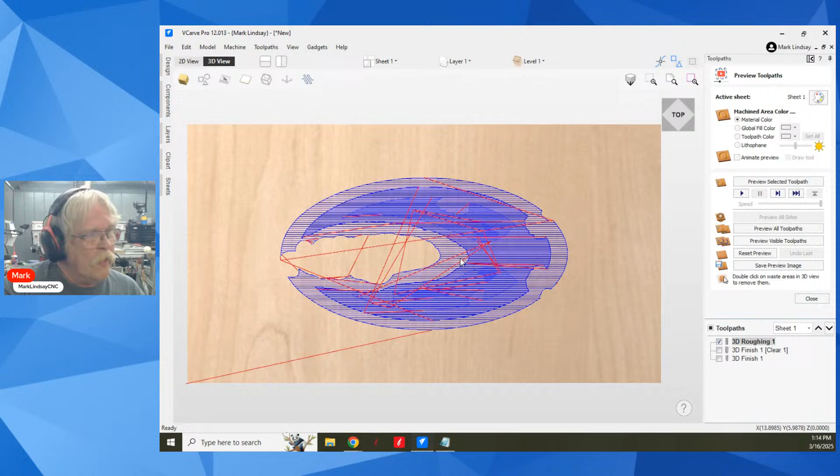What I was going to say was you have all your play and pause controls here when you're working with these toolpaths. Now you can play, pause. You have to be quick. I'm not sure why it's not letting me turn down the speed of this preview. Oh, I see, animate. Now it'll let me do it. So you will want to animate the preview. Let's reset it, slow it way down. And when you start previewing, you can pause. You're going to make me a liar.

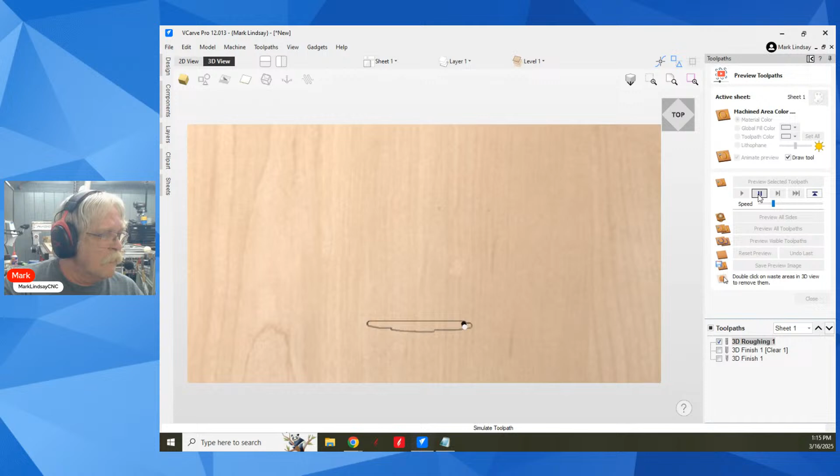You're going to make me a liar. Okay, that's fine. Maybe it'll only allow me to pause it while I've got the tool drawn. Undo last. Slow it down. There we go. I have to be animating the tool. Okay. So now, if you're looking at doing something within the, let me go ahead, and I paused it. Bring it all the way up, undraw the tool and undo the animate. Play, let it get done.

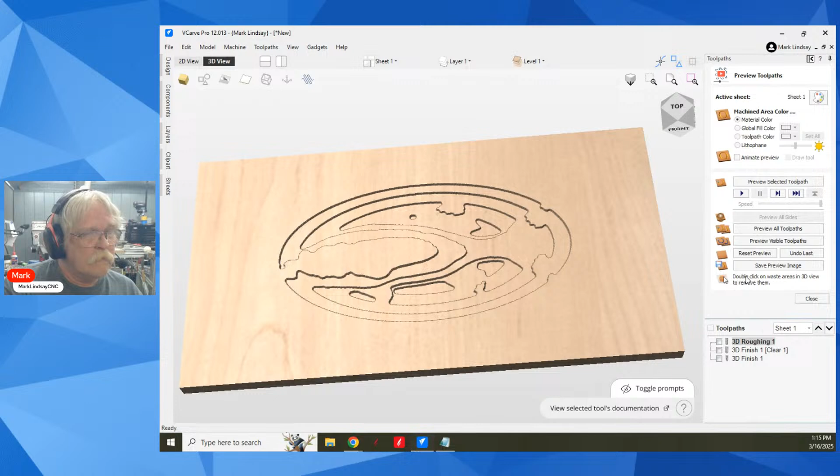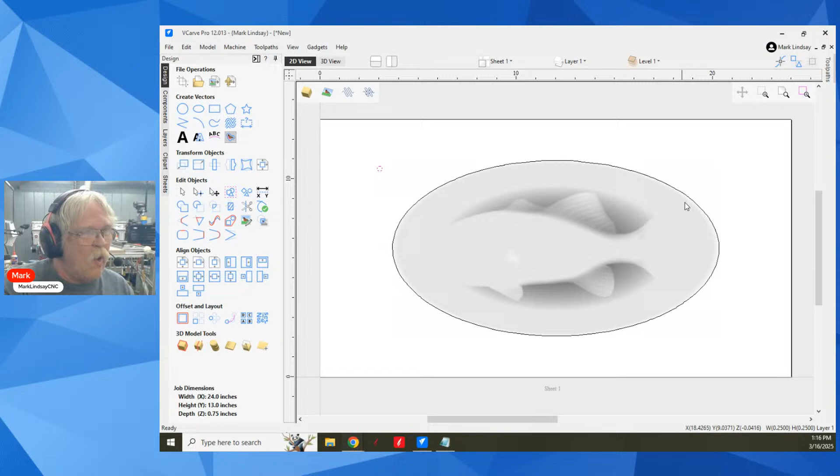Reset the preview. If you're looking at doing something out here in the 2D view, what I generally do is I will draw a circle equal to the size of my tool. Boom, close, and then I will try to fit that into the nooks and crannies you're trying to get in there. So yeah, watching the tool is fun, and if you got the time, go for it. But generally speaking, I don't need to know where the tool is going to go because I can see where it's going to go by looking at the toolpaths.

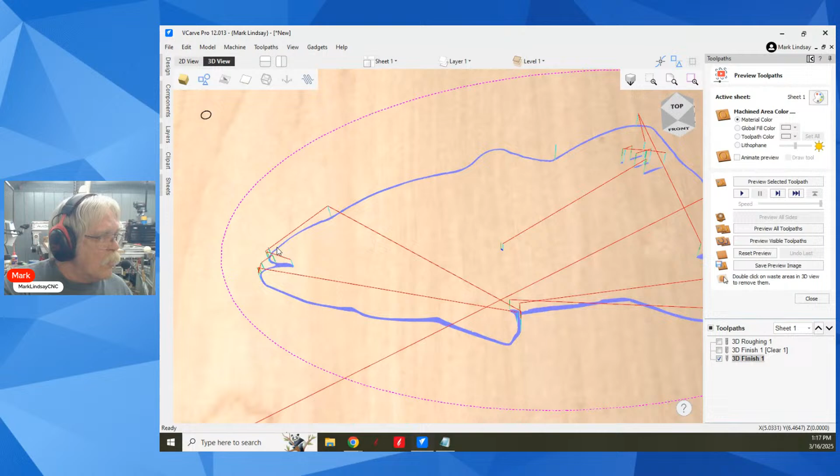And something else to remember, in version 12, you can turn on the vectors over here. If you have a bitmap, you can turn on the bitmap over there. Okay. So my vector's out here. That's how close to my vector this roughing toolpath is going to get. Uncheck that. We'll check the 3D finish. That's a big one. That's going to go all the way out past that vector. Okay. Uncheck that. Check here. That's only going to do the little details that 1/4 inch end mill couldn't get. Okay.

So I don't know if that was any help for you or not. John says, I'm afraid to not watch it. That's when bad things happen in my world. Well, you know, if you're talking about out on the machine, I do. I am here. I'm not one of those people that has a baby monitor or a webcam or something like that. Start the machine, then leave. I don't do that. That's also why I have a bad reputation with a lot of people in that, for instance, each one of these would be its own toolpath in its own piece of G code because then I'm in control. I say when I'm going to run that piece of G code.

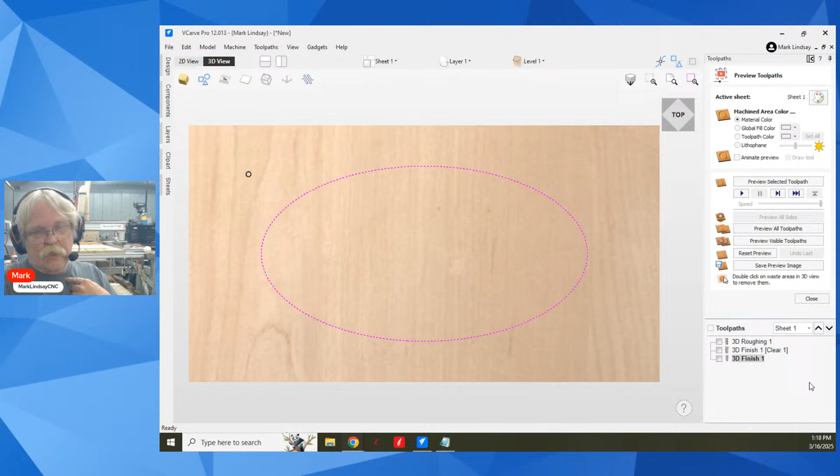Okay. Because if I want to run my roughing toolpath, then go in the house and make a sandwich, come back out, and believe me, there's nothing more satisfying than eating a sandwich watching the machine run. But if I want to go in the house, make a sandwich, come back out here, then start the next toolpath, do my first finishing toolpath, I can sit here and munch away and watch it, then get up and get back on the table saw. I'm here within the shop. I'm not in the house pretending to watch it. Okay. I don't leave this unattended. I may not always be able to save a project, but I haven't burned my shop down and I haven't crashed the machine to the point that I couldn't fix it.

It's just me. You wouldn't run your table saw without you being there. I won't run this without me being here. So, and I'm with you, Jared. More satisfying to watch the tool while it's cutting. Yep. Jim Brown says you can draw in 3D in version 12 also. Yes, you can. And more drawing tools are coming in 12.5. I can say that. Let's see. I love watching my CNC do a 3D carve. I'll watch it for hours.